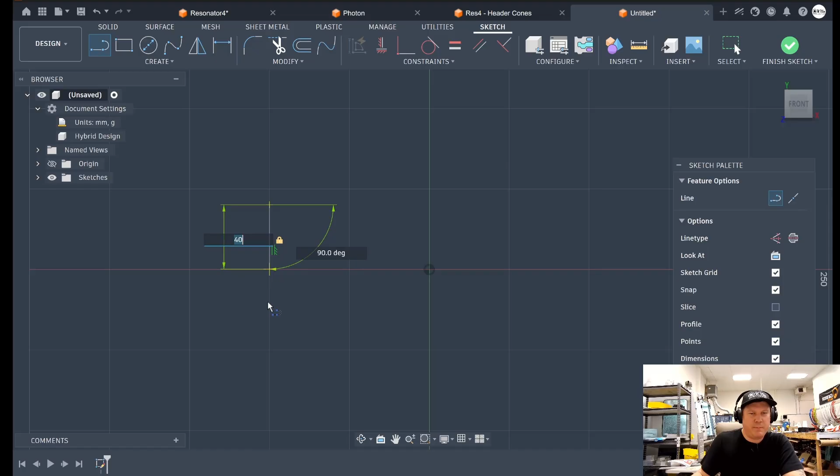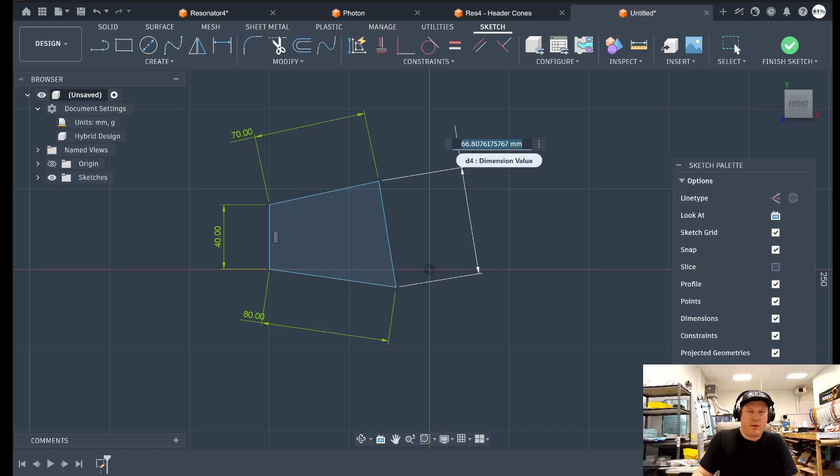And I'm going to draw the side representation of the cones. So let's say, I don't know, 30 millimeters we'll start with. Let's do 40 millimeters, okay? So I'm drawing the first cone. What I can do now is if I know the dimensions that I need to be using, I can hit D, and then I can set my dimensions here. 70, 80, because I want it to curve, and this is how much I want it to increase by. Sure, 65. Sure, why not?

Okay, I'm going to draw the next cone. I'm only going to do a few cones because this is just an example. Again, I can go dimension, D, sure, 140, sure, 125. Obviously, I'm just plugging in random numbers. Next cone, I'll just do 3 cones just to show you this. D for dimension, 189, why not? 160, okay, 160. This is not fully defined.

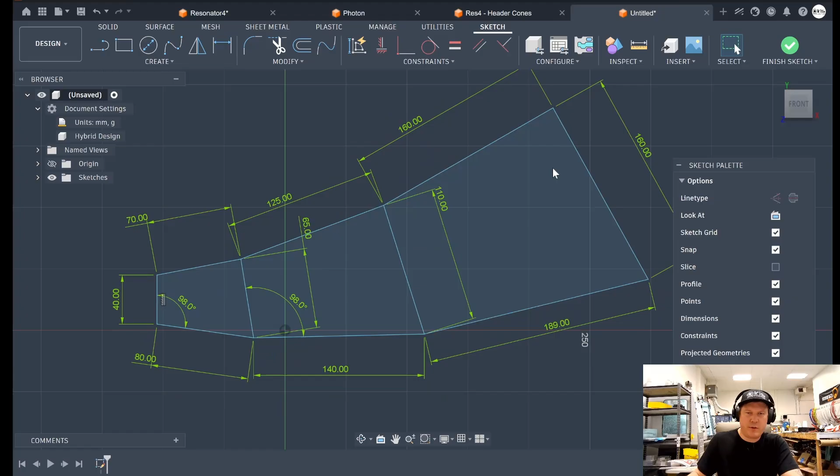What I can do is I can define the angles, but I don't think that's necessary right now. Let's actually do that just to lock things down a little bit. 98, sure. So this will, oops, this will kind of constrain this in how it moves. So I can move the whole thing. If I remove this angle, I can still move. Oh, I have to lock it down. So let's constrain, fix, sure, I'll fix 1 point. See, now I can, whoa, I can move this cone still carefully.

But this part is locked now, so it stays, so I can move just the last cone that I added if I want to tweak it. Or you can remove those constraints and just keep the front, but see, if you don't constrain anything, it starts to move like this, which is a little bit unpredictable.

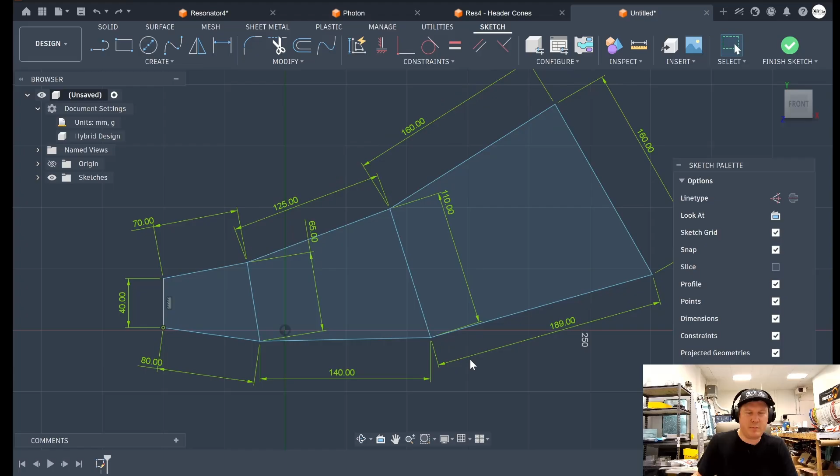Anyway, sure, I'll leave those angles in place. We're going to call that good. That's going to be our 3 cones. Obviously, we need more to do a full pipe, but this is a good place to start. We're going to finish sketch. Now, you can see this is the flat representation of our pipe.

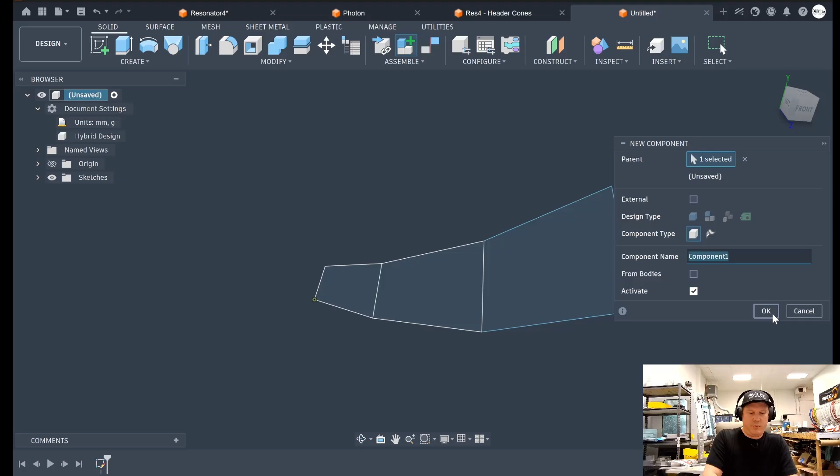Now what I'm going to do is add a component, new component. We're going to add a component for every cone. So I'm going to do just one. I'll call it that, okay? Now what I need to do is create the round, here I'll just show you, the circles that represent the 2 cone ends. I'll put it that way.

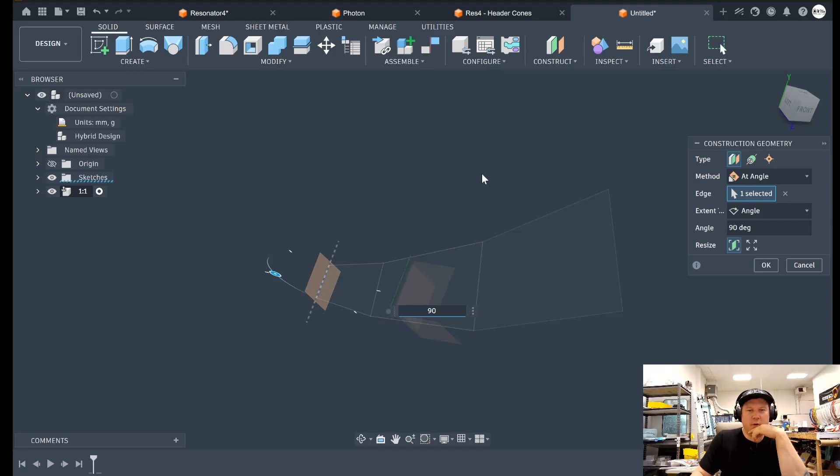So we're going to do a plane at angle, and we're going to take these vertical lines that separate the cone sections. So I'm going to take this one here, and this drew a plane that is in line with the sketch, but I'm going to turn it 90 degrees. So as you can see, what I just did is I put a plane on the end of that line, on the end of the cone, basically. I'm going to do another one here, plane at angle, 90 degrees. So see, now I have 2 planes between the cones.

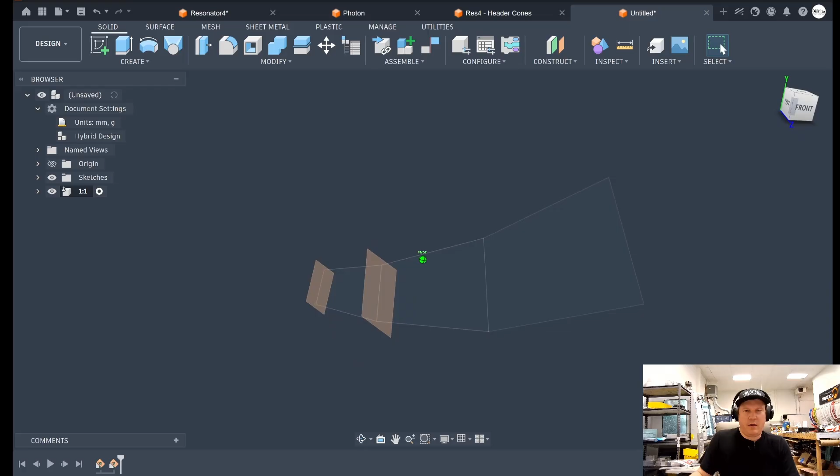Now, here I'm going to pretend I'm modeling the inside of the pipe. This is important. I could also just say I'm modeling the outside of the pipe, but I've decided here that I'm going to be doing the inside of the pipe. You'll see why in a second. So I'm going to create a sketch now on one of these planes. I'm going to rotate so I can see that line again.

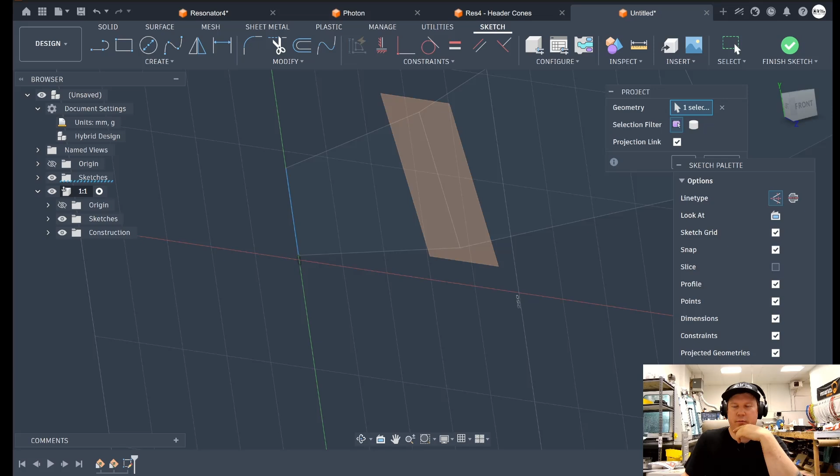And what I'm going to do is say create, project include, project. I'm going to grab that line, but I'm going to do line type as construction so it doesn't interfere with my circle or with creating a loft later. You'll see. Finish sketch. Okay, so sorry, not finish sketch. So I've drawn that line. Let me go back into the sketch.

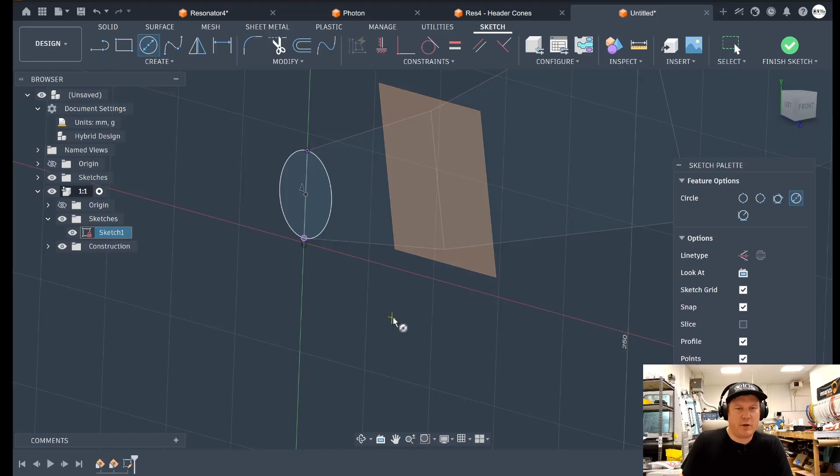And now I'm going to draw a circle, but the circle I'm going to draw from the center of that line to one of the points. So now there's a two-dimensional circle representation of that flat line. And now I'm going to offset it by the thickness of my metal. So let's say 1 millimeter. Sure, why not? We're going to finish the sketch.

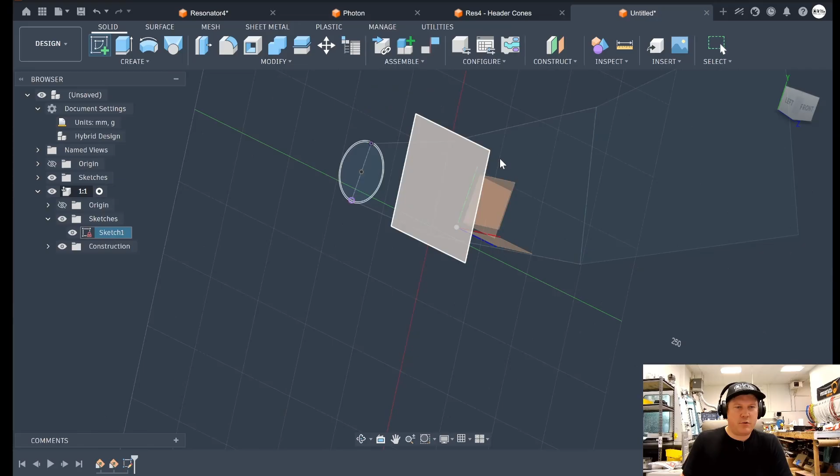We're going to create a new sketch. We're going to go to this plane, and I'm going to rotate it again where I can see it. Create, project and include. You can just press P on your keyboard, by the way. I'm going to do line type as construction again. I'm going to pick that line. Okay. I'm going to turn off construction mode now.

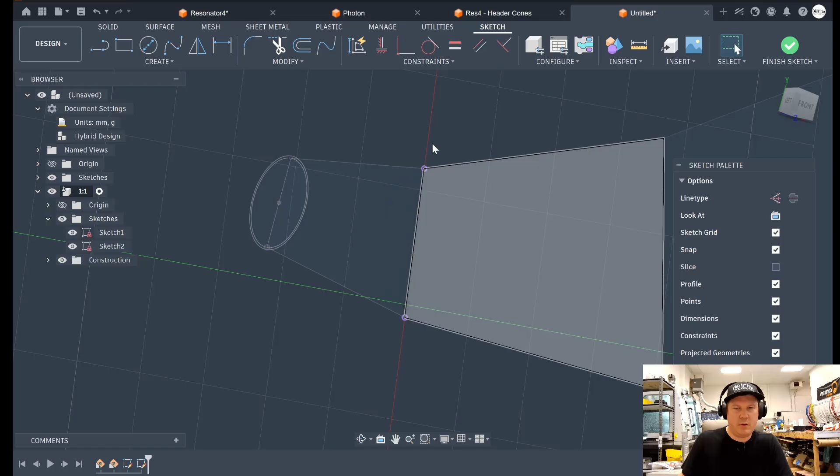I'm going to draw a circle. Oops, I missed. Also, I'm not on the center of the line. You want to see that triangle snap. Oh, Jesus. I could drag that, but I'm going to just draw it again. Okay. Offset 1 millimeter. Sure, why not? All right, so I have everything now I need to model my first cone.

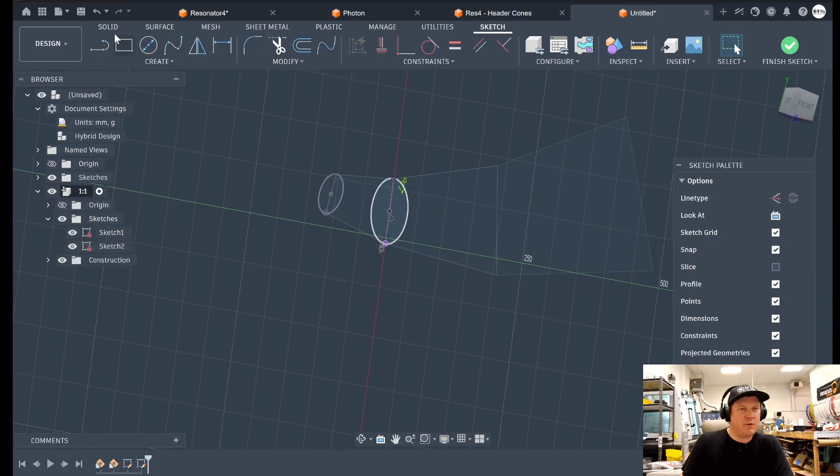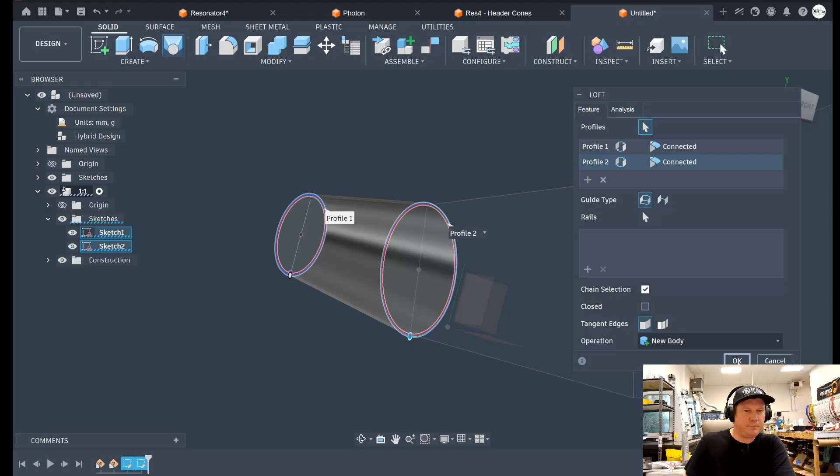So what we're going to do is make a loft. Loft from this to this. Now what's kind of annoying is this makes a solid loft. I wish there was a way to do just the section that I select, the blue, where it would have a hollow loft. I haven't figured out how to do that yet. So I'm going to have to do this in 2 lofts. So I'll do this loft, which makes the body of the cone. I'm going to hide it, show my 2 sketches again.

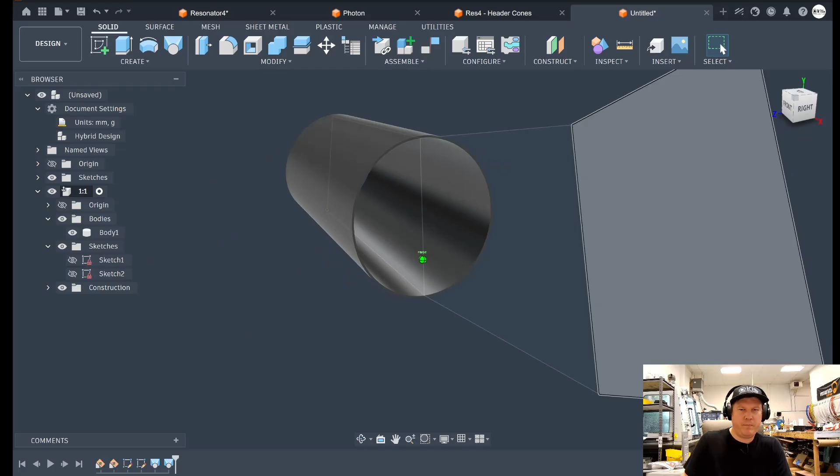I'm going to do another loft with only the inner circle. You see what I mean? I highlighted just the inner circle. I'm going to bring my body up, and this automatically recognizes that I'm trying to do a cut, and then I'll do a cut. I can hide the sketches for now. And now you can see I've made 1 cone. I'm going to do this very quickly for the other cones. So I have 1 part.

I'm going to leave the second sketch up. Now I'm going to go back to my original document. I'm going to make new component. Oh, I'm going to name it 2. Oh, not 3, 2. Okay.

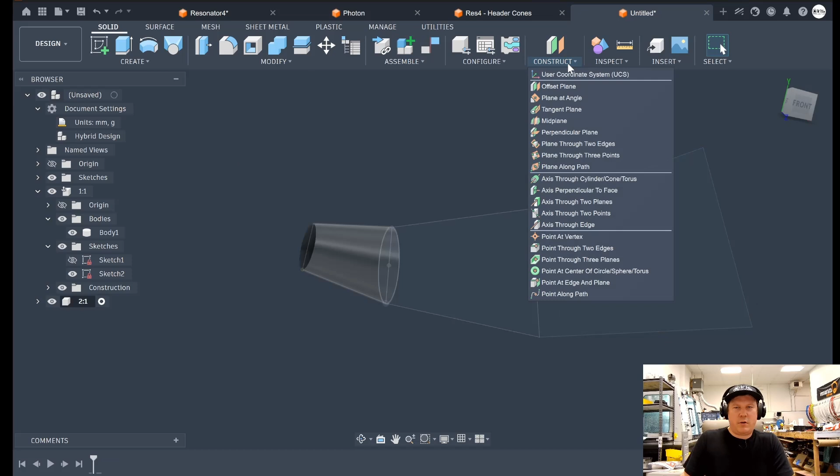Construct plane at angle 90 degrees from that line. On that line, create sketch. Whoa! Nope, that's not what I meant to do. Create sketch. Click that plane. Rotate where I can see it. Create project.

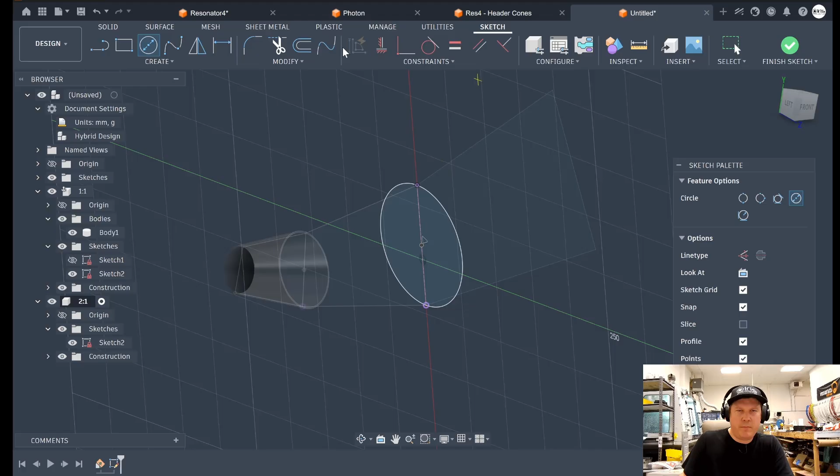Construction. Make sure to have the construction. There's my line. I'm going to draw a circle. Not construction. Circle. Then offset that circle by 1 millimeter. Finish. I have my second. We're going to create a loft. I'm going to hide this first body so it's out of the way.

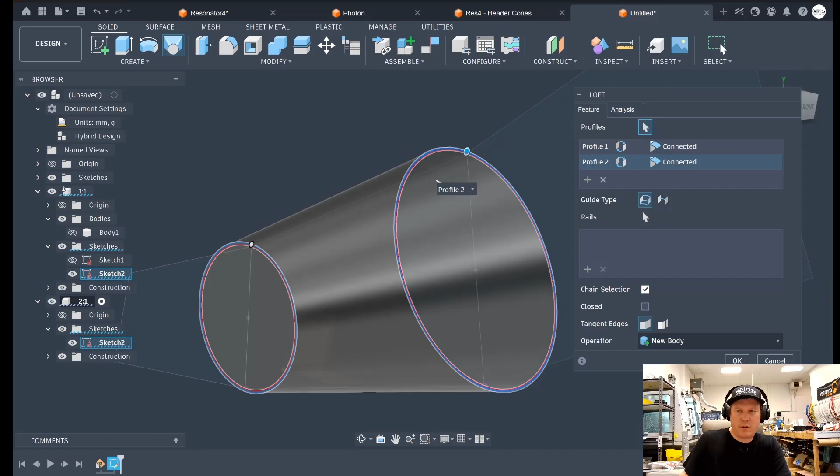From here, from the previous sketch to the new sketch. Sure. Okay. I'm going to hide it so it's out of the way. Toggle my sketch back on. Loft. Circle, inner circle to inner circle now to make the cut through the center. Okay. Now we have 2 cones. Back to the main document. New component. Okay.

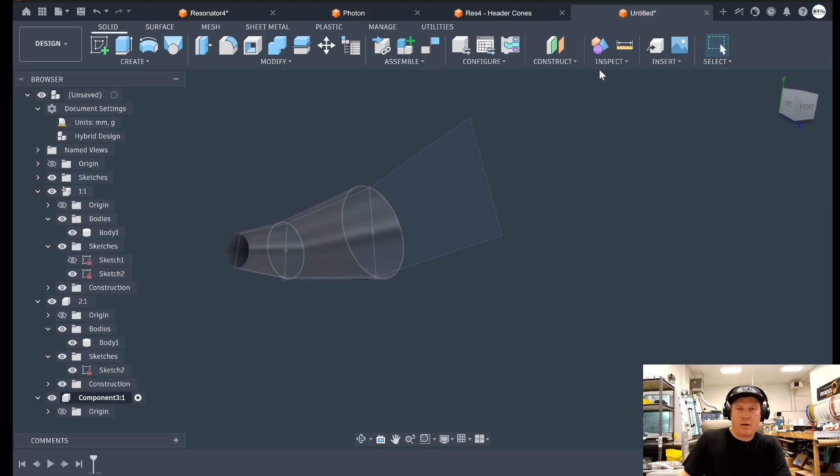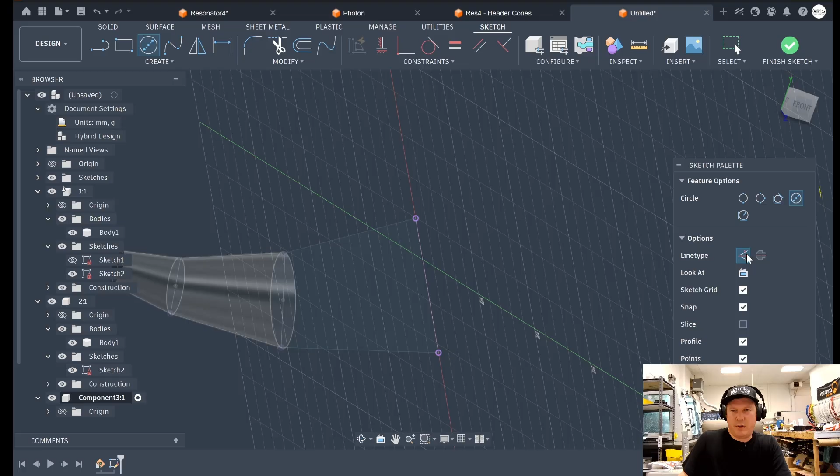Construct plane at angle. That line 90 degrees. Create sketch. Rotate where I can see. Create. Project include. Project. Or just hit P on your keyboard. Construction. Okay. Circle. Not construction. Grab that center. Grab that point. Offset by 1 millimeter. Okay.

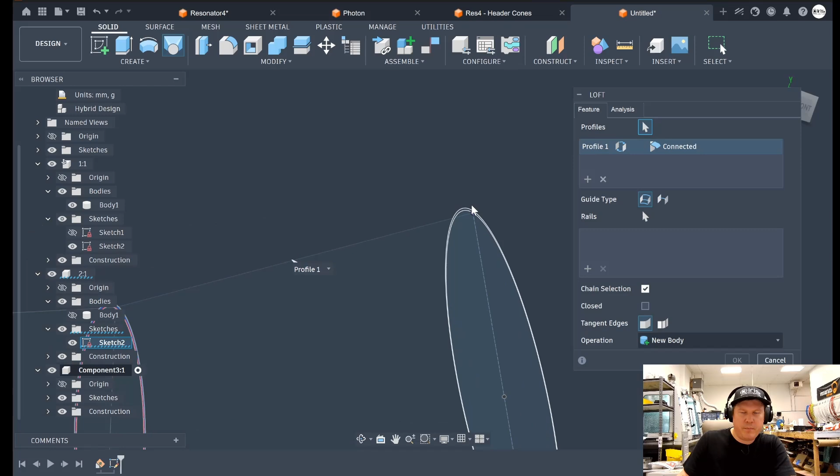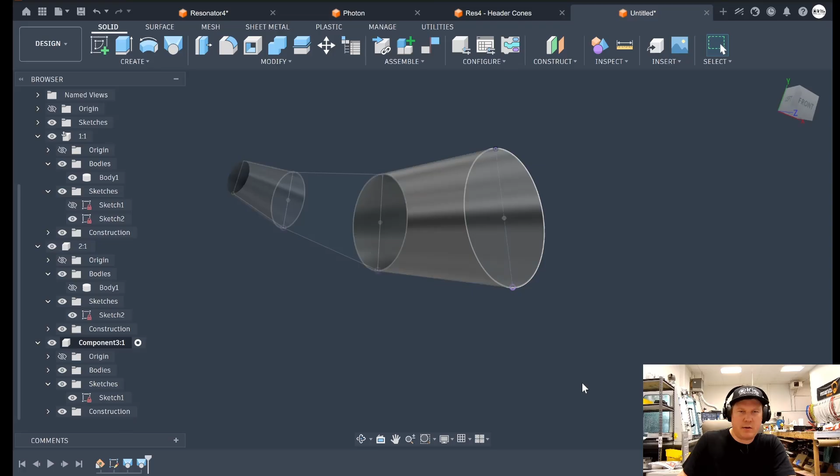Solid loft. Oh, I don't have my sketch visible because, oh, I do have my sketch visible. Yeah, okay. Let's hide that body so it's out of the way. From here to here. Okay. And then bring my sketch back up so I can use it again and hide the body. Loft. Now just again, the inner circle to the inner circle. Show the body. Automatically recognizes a cut. Okay. Boom. I'm going to go back to the document.

And now I'm going to hide some of these sketches because now they're just in the way. You can see our base sketch. Might as well leave that up. Going through the center of the pipe. And now we have our pipe with 3 cones. So now this is a valid model, valid solid model.

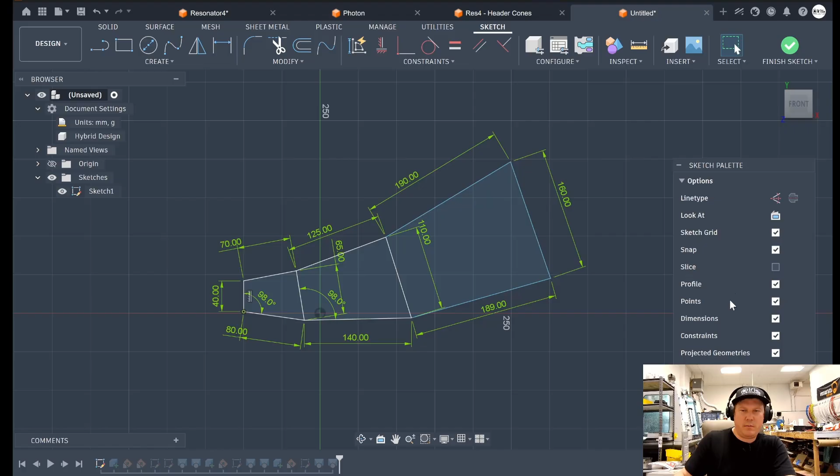And what you can do is you can go back to the original sketch. And you can edit any of these dimensions. Say 190, 210. Sure. And it updated right away, so you have a valid 3-dimensional geometry.

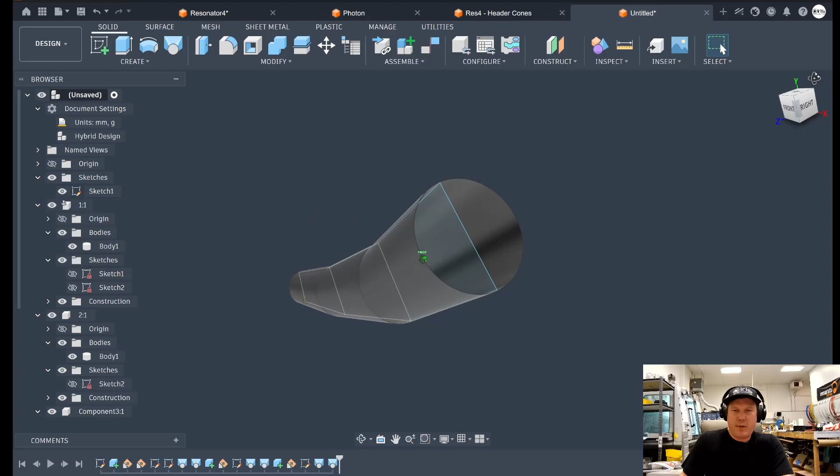Now, here's the catch. This needs to be sheet metal, and sheet metal is like, if you think about it, I lost my parts. Sheet metal is a flat part that gets rolled up, but to do the opposite, you have to unroll this. But there's no way to unroll a continuous cone that's modeled in CAD. So now what we need to do is effectively turn this into a valid sheet metal part.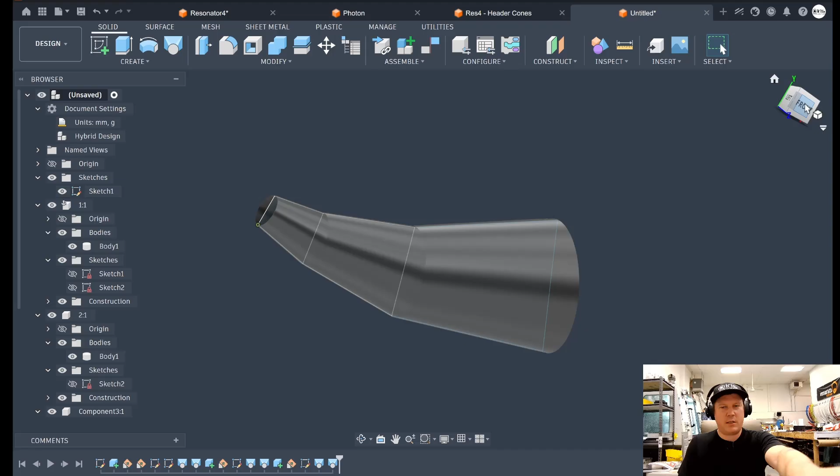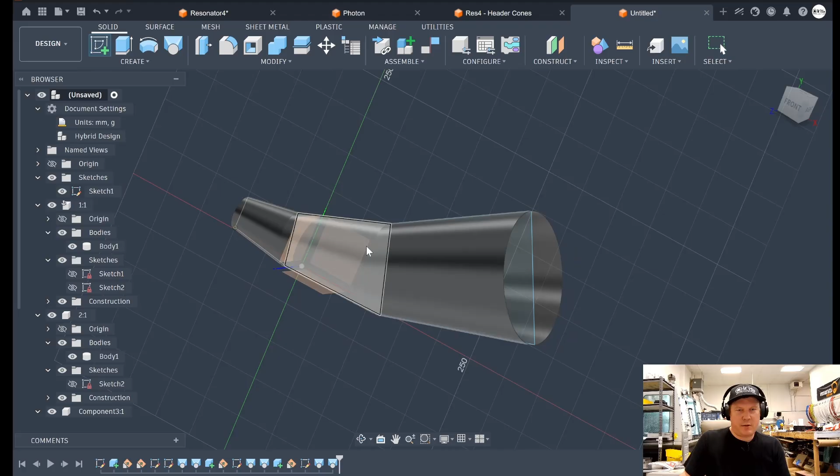To do this, we're going to cut a hole in it effectively all the way down. And then we're going to add an extrusion that's flat, that will make a flat spot on the cone, which will be the starting point for the sheet metal part to work. Okay, so I'm going to make a new sketch. I'm going to click the same plane that I used before. Whoa, actually, I'll just click the original sketch, which will give me that plane. And I'm going to hide the original sketch now because we don't need it.

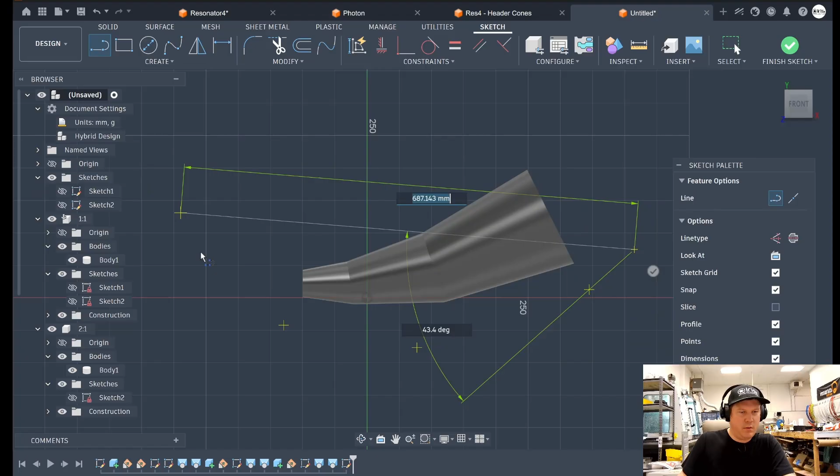Okay, and I'm going to roughly draw a sketch kind of through the center of the pipe. And then I'm going to continue it. Where is it? Oh, what? Hold on. Oh, my sketches aren't visible. Where am I making a sketch? Oh, okay. Well, I hid the sketch that I was editing. I'm going to finish this.

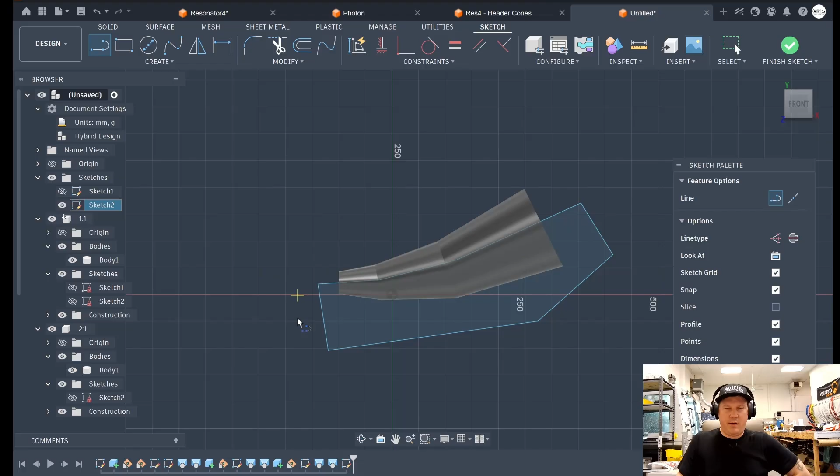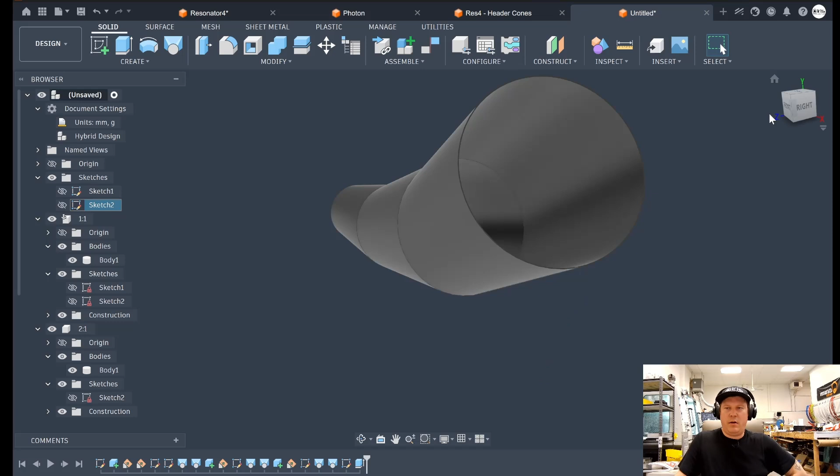Right, so I drew a line through the center, and then I finished it off to make a complete shape. Now, what I'm going to do is make an extrude, let's say by 3 millimeters. Sure, why not? 3 millimeters. And it's automatically recognizing it as a cut and wanting to cut all three of our parts. Okay, so now we have our pipe with a little piece missing.

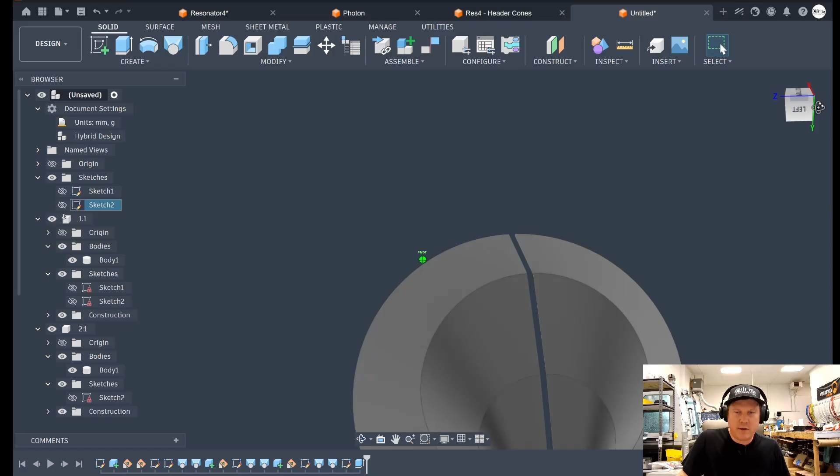And now what I need to do is to make a little flat section that's just a simple extrusion, which will allow Fusion to recognize this as a valid sheet metal part. So I'm going to do an extrusion on each part. I'm going to go boop. I'm not going to go to 3 millimeters. I'm going to go slightly under. I'm going to go 2.8 millimeters. Sure, why not?

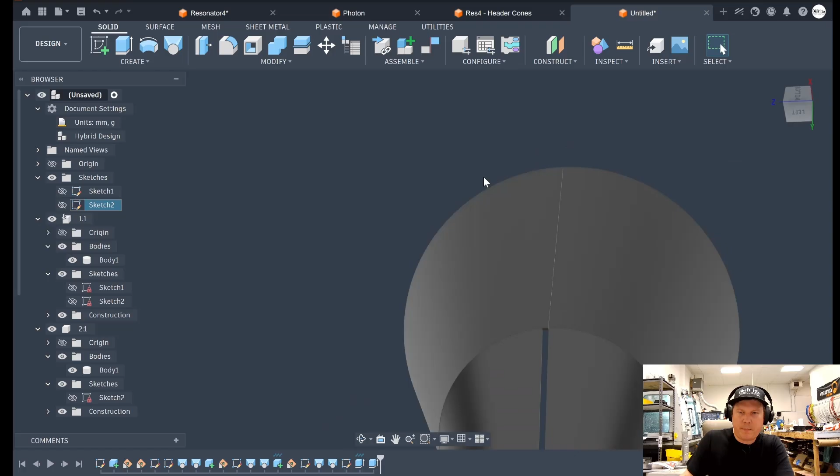Did I do it on the right side? Sure, why not? Okay, extrude. I'm going to rotate where I can see this. 2.8.

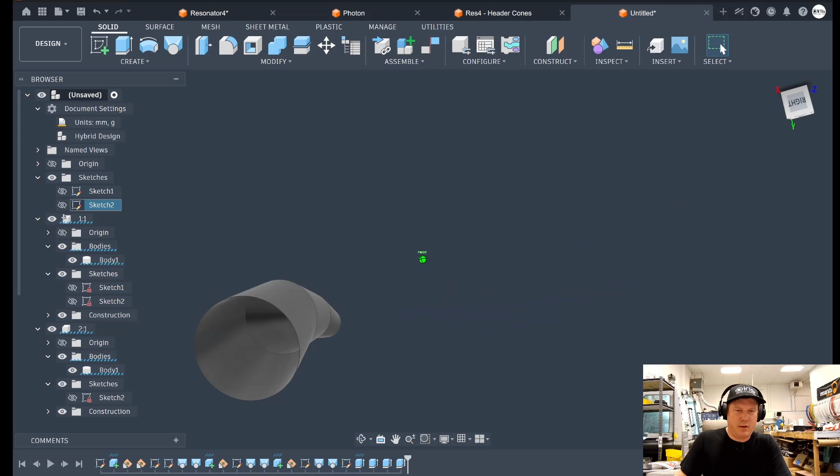Extrude. 2.8. Now, this is close to a valid sheet metal part, but it is not. You cannot convert this into a sheet metal part. The reason is this is not, when rolled, how sheet metal works. It's not a perfectly symmetrical cylinder. So here's what you got to do.

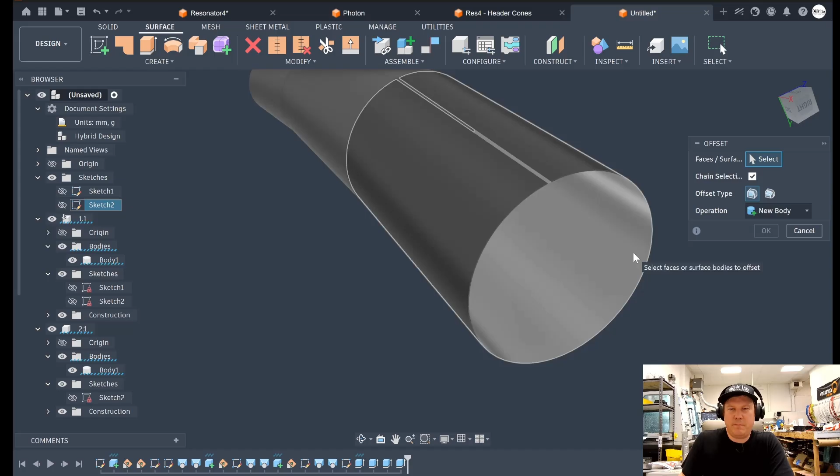We're going to first convert this to a surface. I know there's a lot of steps. Okay, we're going to go to the Surface tab. We're going to create offset. We're going to grab the inner face. And offset is 0 because we're just basically grabbing the inner face and then in a quick way turning it into a new surface. Oh, shoot, I'm gonna undo that.

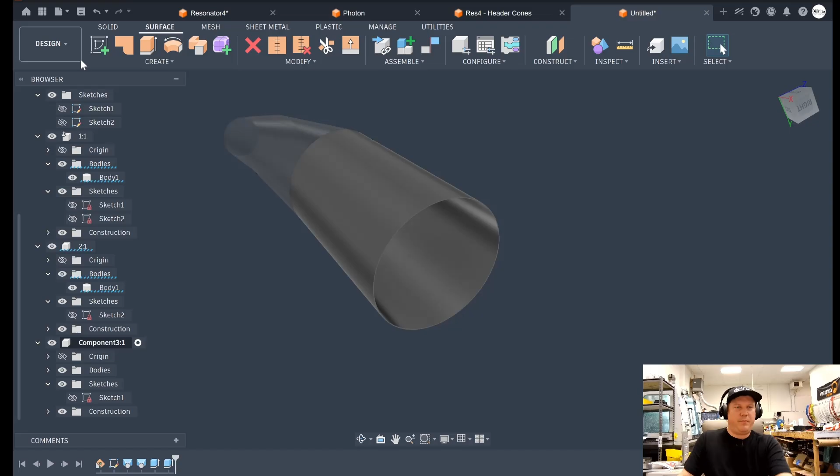You gotta select each cone. I'm working backwards here from the big one, I guess. So I selected the cone so it creates the surface inside of this part. Create, offset, grab the inner, 0 offset, new body, cool. I'm gonna hide the original body. See, now I have just the surface.

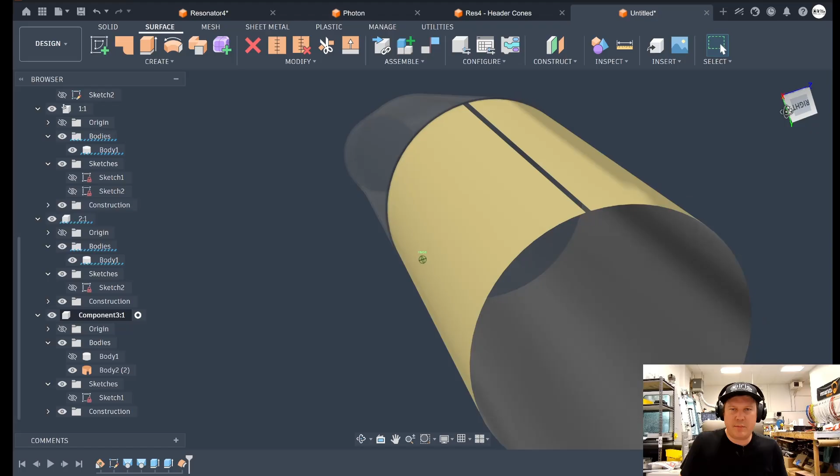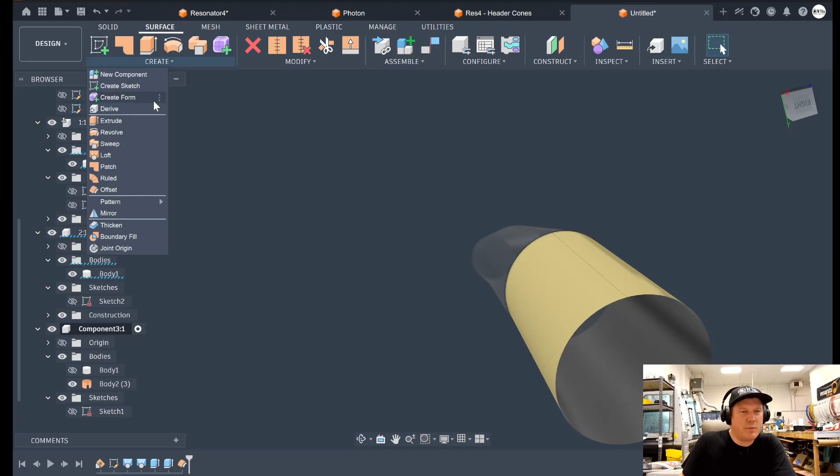Oh, it didn't grab the... Okay. Wait, did I screw this up? No, okay. I didn't grab the small face here. I'm going to grab that too. Okay. Now, to make this valid, so you can turn it into a valid sheet metal part, I'm going to go create, still in the Surface tab, thicken. I don't think I did this right, by the way. Yeah, I didn't do this right because I didn't do the extrusion on the right side. I'm going to back this up.

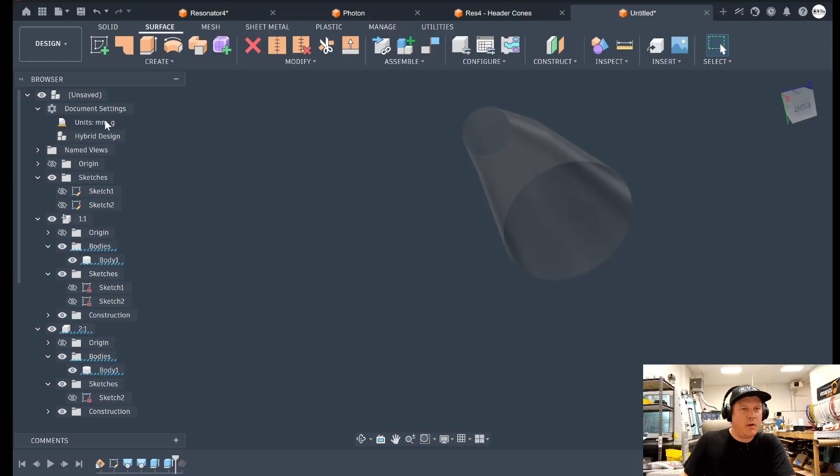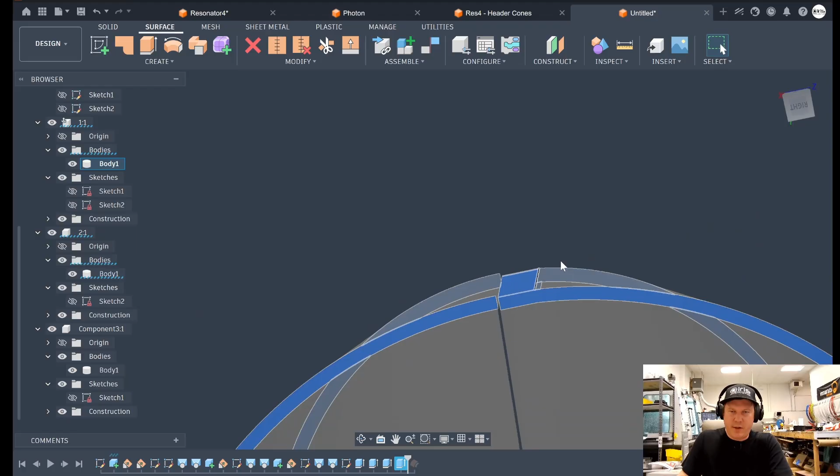Okay. So I screwed up these 3 extrusions because I did them on the wrong side. Let's see which side I did them on. Yeah, you see what's going on? See here, if you look at it from this angle, the sheet metal is pointing down. So that little piece I extruded is on the wrong side. Okay, I'm going to back this up to here, to where it was just cut. Do that again.

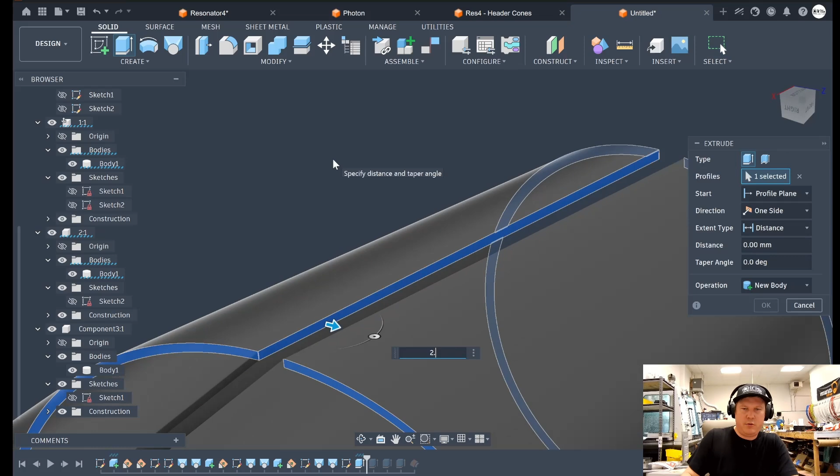Solid, extrude. I'm going to do it from this side now. 2.8. Let's see how that looks. Yeah, that's better. Okay. Yeah, you see this is higher than this. That's what you want. Extrude. 2.8. Extrude. 2.8. Okay. So back to my last cone.

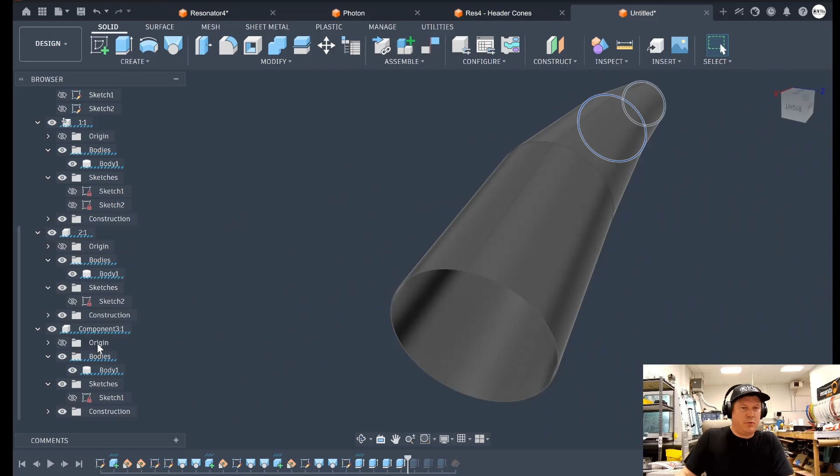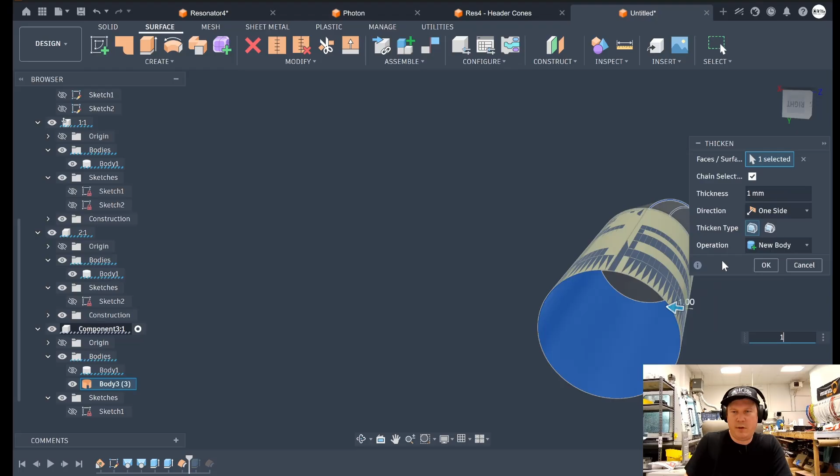We're going to go back to surface, create, offset, grab that. Yes, it's grabbing the whole thing now. Now it's valid. Okay. 0 offset, hide the body. Yeah, perfect. This is what I want. Now, create thicken, 1 millimeter. Sorry. So it's trying to, right now, thicken it into the inside, but we want to thicken it in the direction we started from because we're on the inside face right now of the pipe. We're going to go -1.

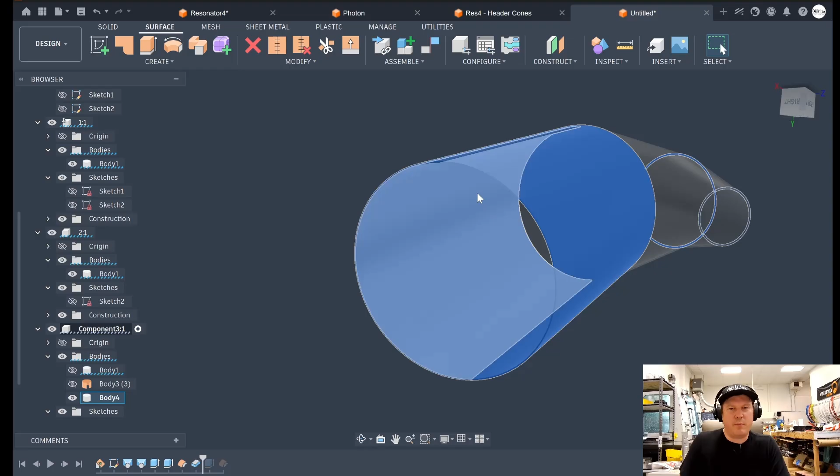Okay, -1. Okay, boom. So now we have a body that is a solid, but rather than being a perfectly symmetrical part, it is thickened from that face, which is a valid geometry that can be converted to sheet metal. Oh, and here's where that flat little part comes in, and there's a reason for it. So now you can go sheet metal, create, convert to sheet metal. Sheet metal needs a starting point. It needs a flat part.

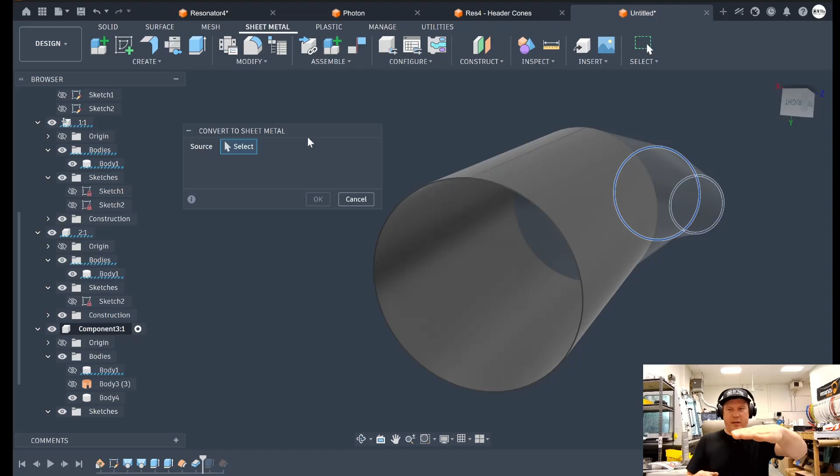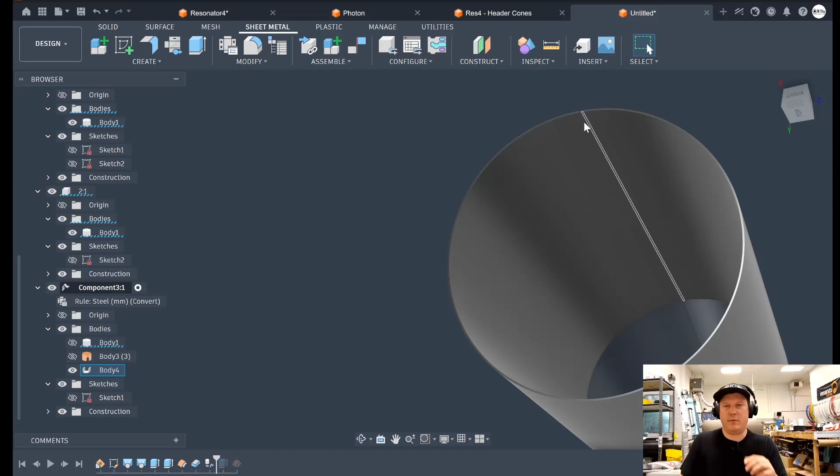So when a part is rolled, it's the same way if you feed the flat cone into the slip roller, you're going to get a flat spot from where you started. So it's the same idea here. So I'm going to select this cone, but I'm going to select the flat part. Boom, boom. Steel, millimeters. Okay, cool. Now, this is what you want. You have now a valid sheet metal body that has a flat spot where it starts. So now you can create a flat pattern of this part. So this is just one of the cones. I'm going to do that right now so you can see how this works.

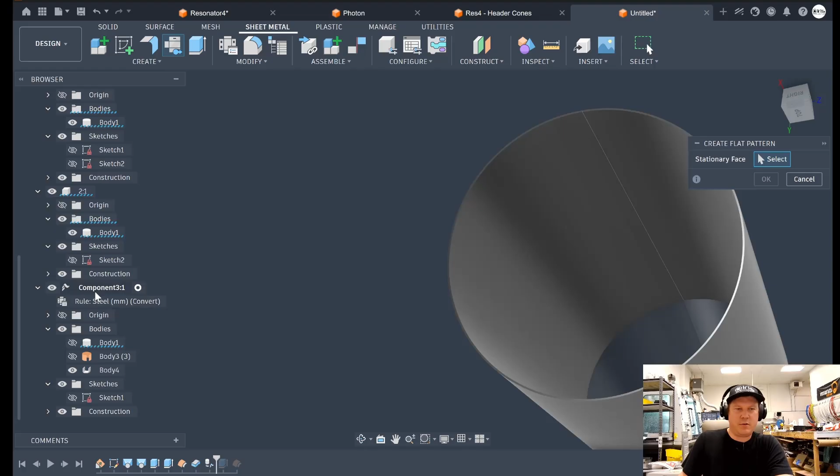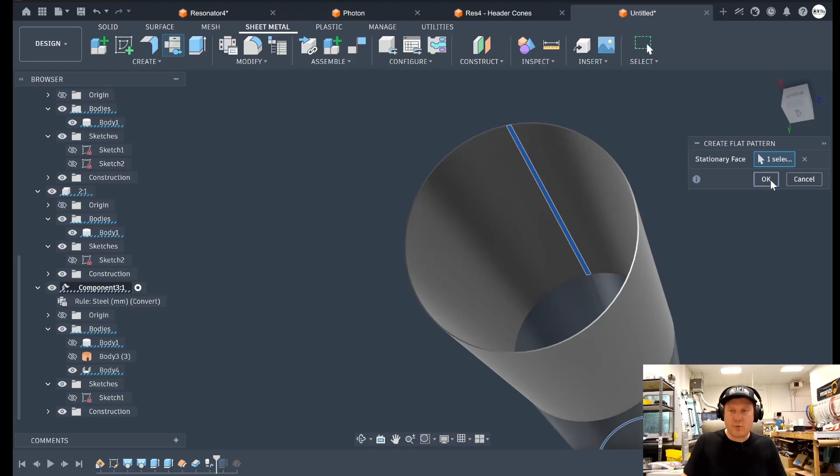We're going to go create, create flat pattern. And by the way, this is why you want each cone in its own part, in its own component, because a flat pattern is created for the part. So if your whole pipe is in one part and you have multiple bodies as cones, then you can only have one flat pattern. So this is why I broke it up into individual ones. So now I'm going to click here on the flat spot. That's your starting point for the flat pattern. Okay, and it unrolled like magic, that cone.

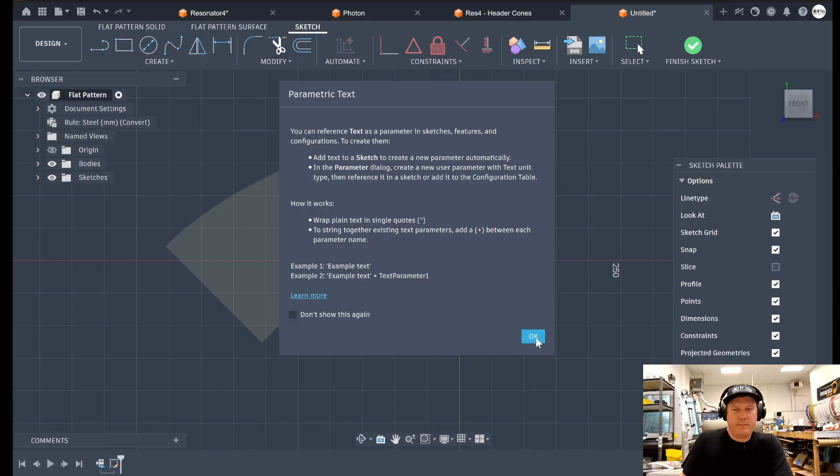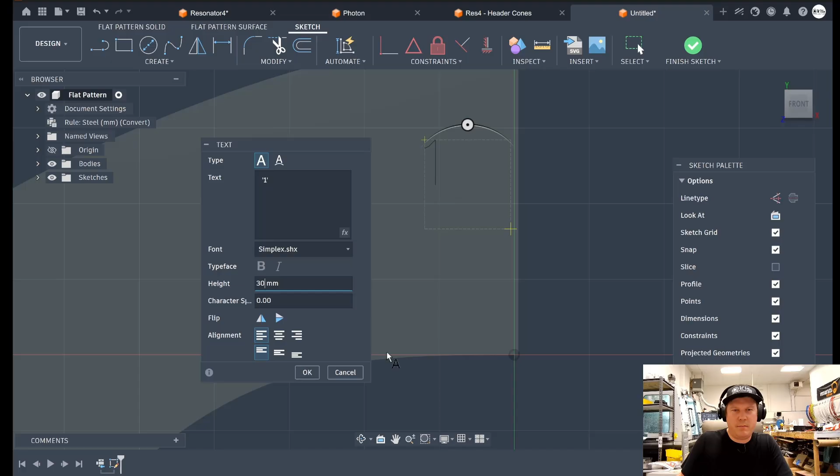And I'll go 1, but sure, okay. Where's my, what? Oh, it's really big. Okay, sure. 30. Okay. Okay, see now I have a sketch that has a 1 there, so I know that's the edge I would start rolling from because that's where the flat spot is.

And I know this is the bottom of my part. And now what I can do is finish the sketch. And you can see it has all the elements I need. And I can right click on the sketch if I need to export this and export to DXF. And that would send it over to whatever you need to do with it.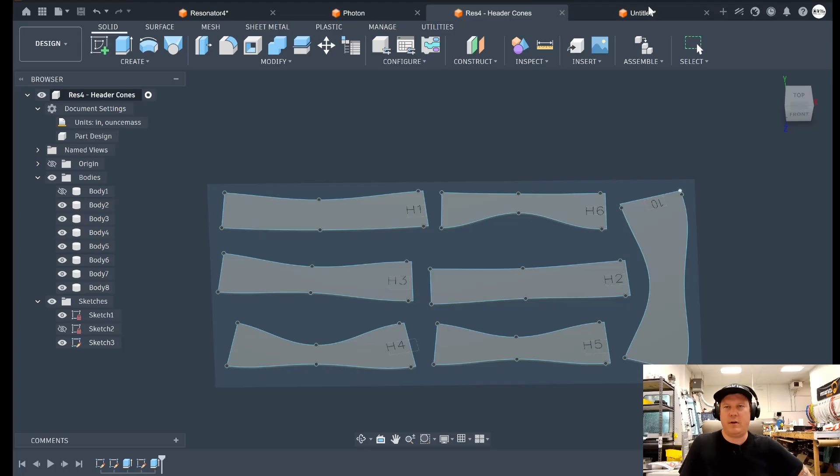In my case, what I do actually is different. I just select this, copy it, finish sketch, and I go into my machining and I paste several of them, and I'm going to cut out. Or I would send these individual parts to my laser cutter guys and they would cut them for me.

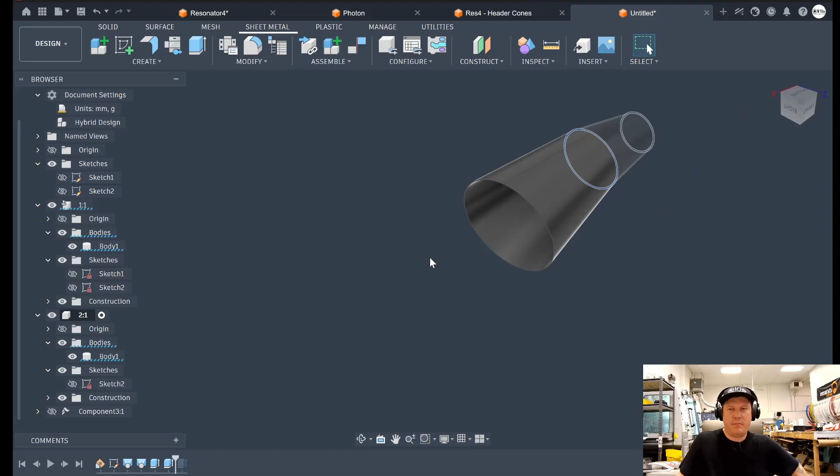Okay, so this is done for one cone. We can finish this pattern. I'm going to quickly go through and do this for the rest of the cones. I'm going to hide this one so it's out of the way. I'm going to go to this one. All right. Again, pretty simple.

Surface, create, offset, click the inner face, 0, hide the first body, create, thicken, select the cone or select that part, -1. It's already remembering that I did this, so it already remembers my thickness that I need. -1. Okay. Now it's valid for converting to sheet metal.

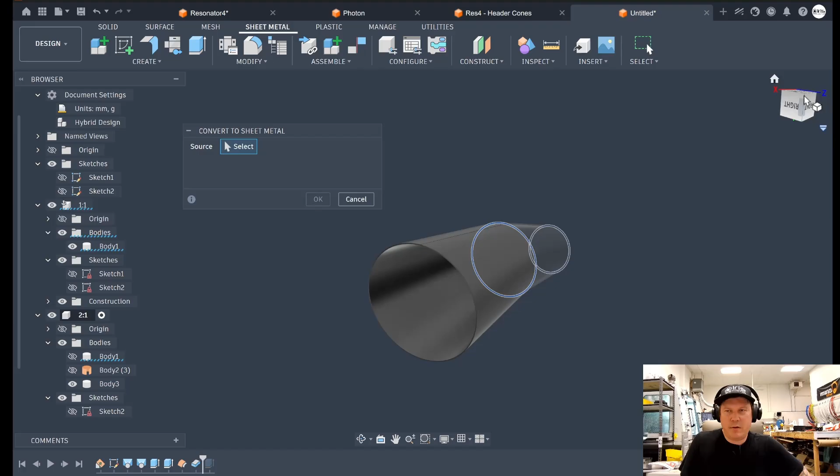Sheet metal, create, convert to sheet metal. Click the flat spot, steel. I don't actually know if you have to click the flat spot there. Create, flat pattern. Here you do have to hit the flat spot. Okay. Unrolled cone. My little line is here, so I know that's my starting point.

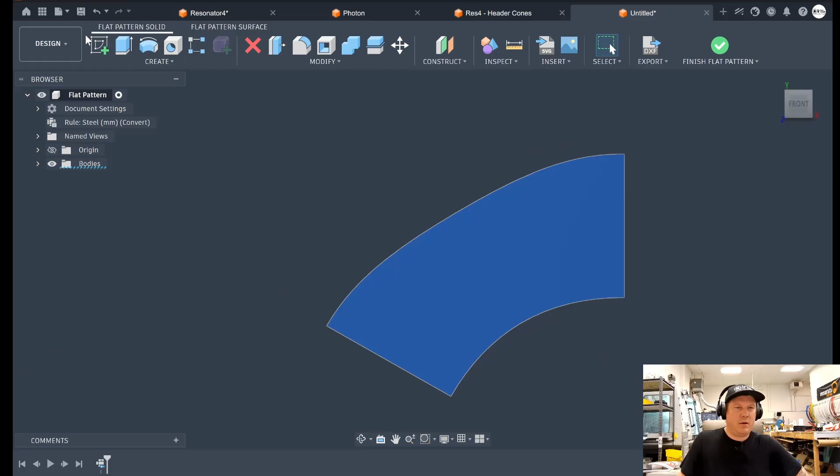Again, sketch, create text. Okay. 2. Finish sketch. Oh, I just realized I'm doing my numbers backwards because this is cone number 2, but the other one was actually cone number whatever. It doesn't matter. I'm just doing this as an example. Finish flat pattern. And then we'll do the last one. Last cone. Done.

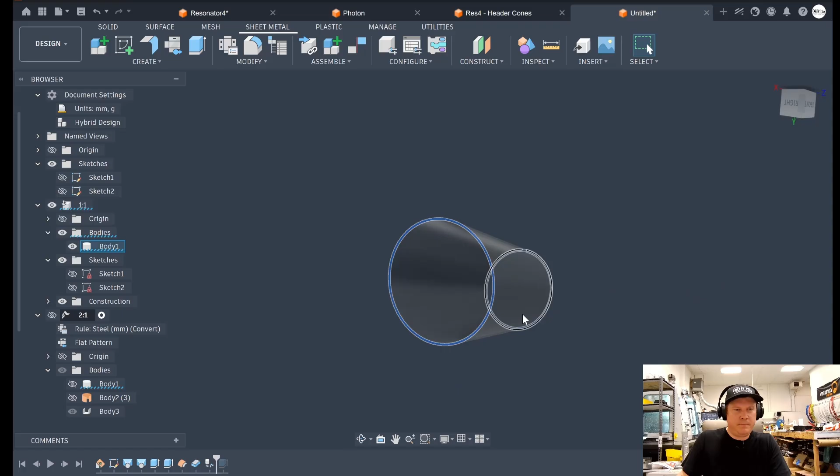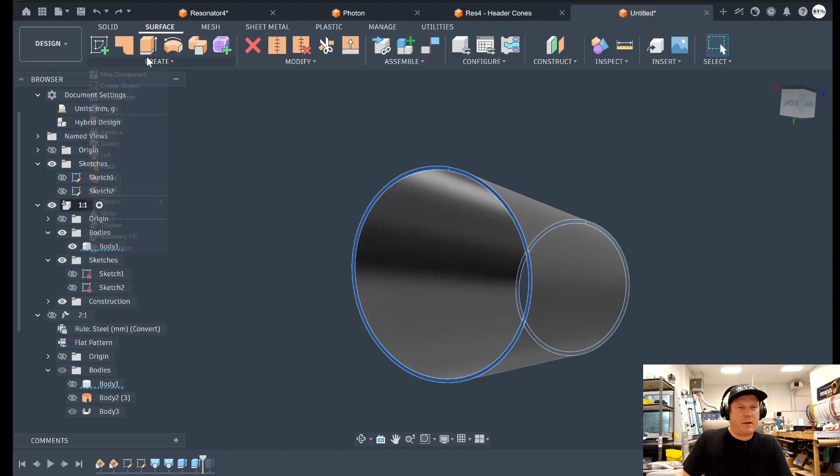Surface. Create. Oh, gotta highlight the part first. Create. Offset. Inner surface 0, hide body, create, oops, create, thicken. What's going on? I don't know what just happened. I did something weird. Okay, create, offset, inner, 0, okay.

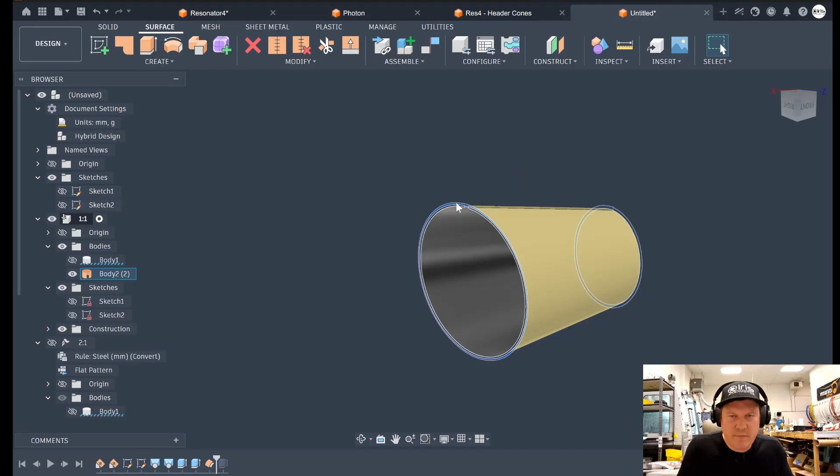Oh, I don't know what that is. I don't know why there's blue. I don't know why the faces are highlighted. Anyway, okay. Create, thicken, -1, okay.

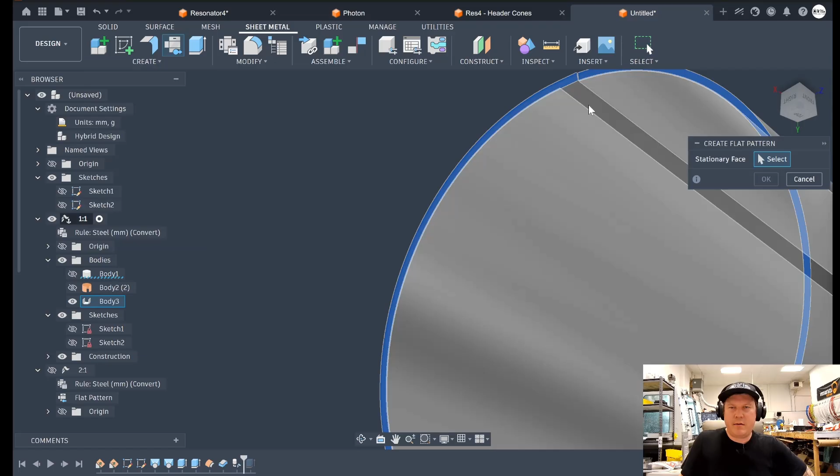Sheet metal, create, convert to sheet metal. Again, I'm not sure if you have to press that flat spot, but I just got in the habit of doing that because in the next step you do create flat pattern, boom, boom, boom. And that is our flat pattern. Where's our line? It's right there.

Okay. Sketch, create text. And again, I'm going to put 3, but this is actually cone number 1. So I did the numbers here backwards. Done.

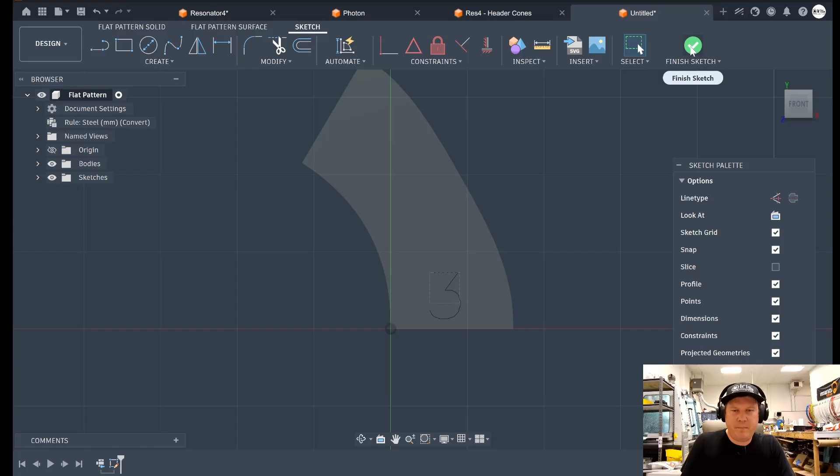All right, so that was probably quite the ride. I realize it's a lot of steps, but if you try to think about what's actually going on and why those steps are taken as you learn that technique, it will all make sense because there's a logical reason for doing every one of those things. And it's just in the nature of how sheet metal parts are in Fusion or in general in real life, and it's just a representation of that. You're just modeling it correctly.

And again, it's really awesome because you can go back to the original sketch now. You can tweak your lengths to what you want, and all of those parts moving forward are automatically updated. You might have to open up each flat pattern, and it will update when you do that.

But in general, just keep in mind once you export to a DXF or copy the sketch to your machining part or whatever project, then that's no longer going to be updated. You have to actually re-export the DXF or copy and paste the new sketch into the final form. But other than that, up to that point, everything is updated. So even if you add different joints in your big assembly of your engine or whatever, then all of that stuff gets automatically updated. It's pretty cool.